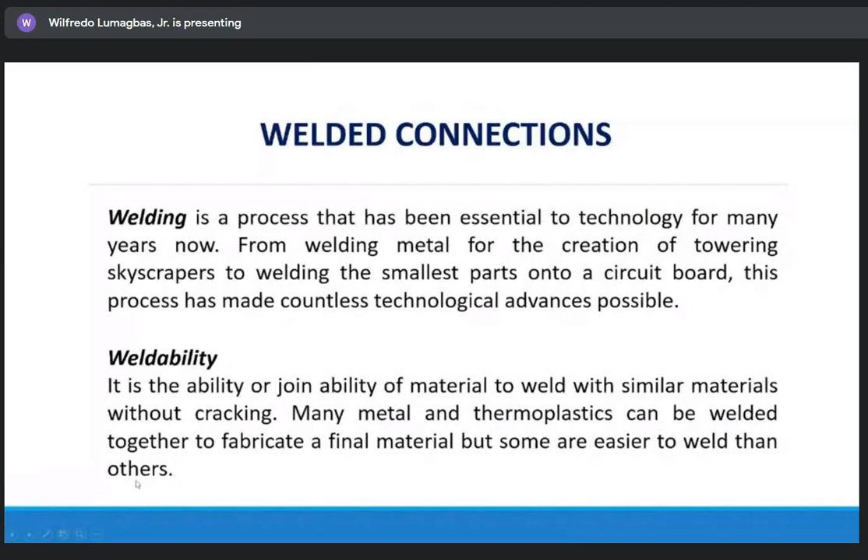To weld with similar materials without cracking. Many metals and thermoplastics can be welded together into a final material, but some are easier to weld than others. That's weldability, and there are factors affecting weldability.

First, thermal conductivity. Second, melting point. Next, thermal expansion, surface condition, and change in microstructure.

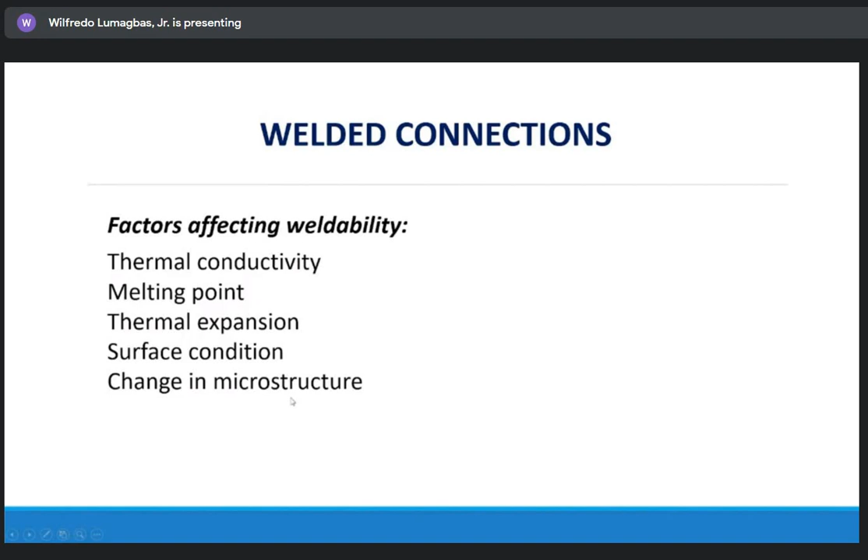Types of welding: Arc welding. Arc welding is the oldest of these three welding processes. In addition, it can also be one of the most cost-efficient methods. In this process, minimal materials and energy are used to complete the job, which makes it easier and faster to perform. However, it takes a lot of practice to create sturdy and consistent welds.

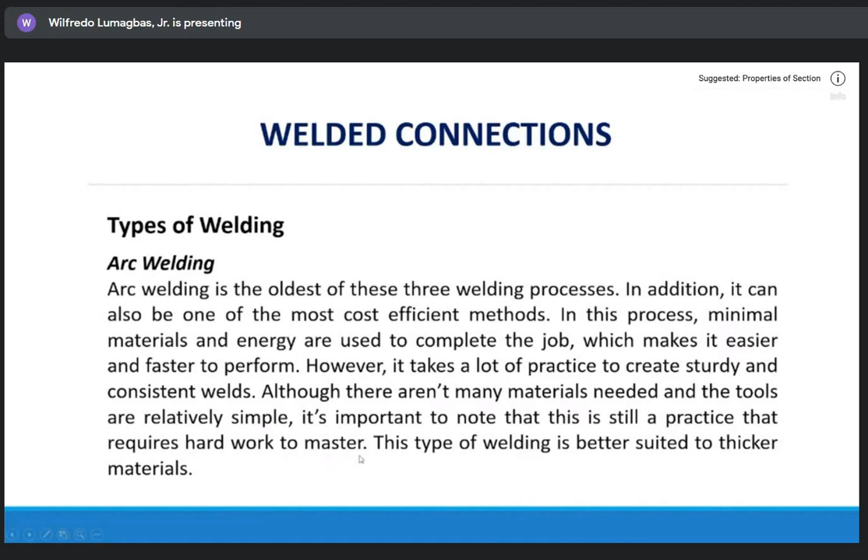Although there aren't many materials needed and the tools are relatively simple, it's important to note that this is still a practice that requires hard work to master. This type of welding is better suited to thicker materials.

MIG welding, also known as GMAW welding, uses a thin wire as an electrode. That thin wire then gets fed through the welding instrument, being heated as it travels towards the welding site. There are two main processes to accomplish this type of welding: gas or MIG, and gasless or flux core.

Gasless MIG saves money in terms of equipment, but also raises costs in terms of supplies. The wire needed for this type of welding is more expensive. Gas MIG, on the other hand, is more complex, yet the wire costs less and it produces cleaner lines.

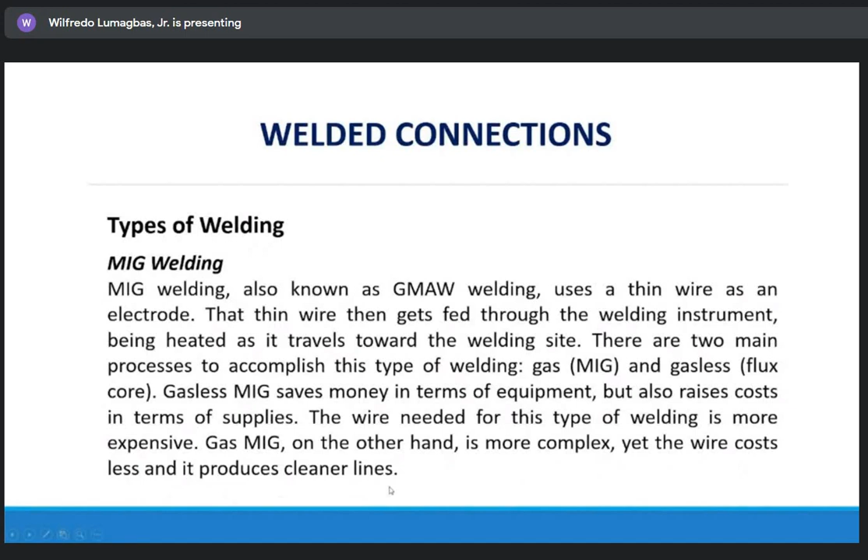TIG welding is undoubtedly the most versatile of all these welding processes. However, it is also the one that takes the most time to master, and it is the least productive of all three. That being said, it also produces the highest quality welds. TIG welding is recommended for larger projects or those in which you need more control over the welding.

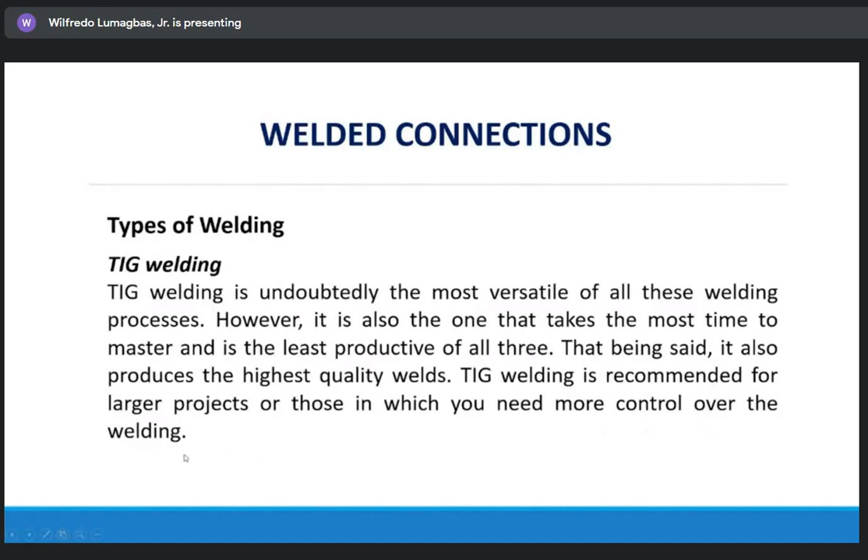Types of welds: Fillet welds. A fillet weld joins two surfaces at an approximate right angle to each other. There are several types of fillet weld. Full fillet weld is a weld where the size of the weld is the same as the thickness of the thinner object joined together.

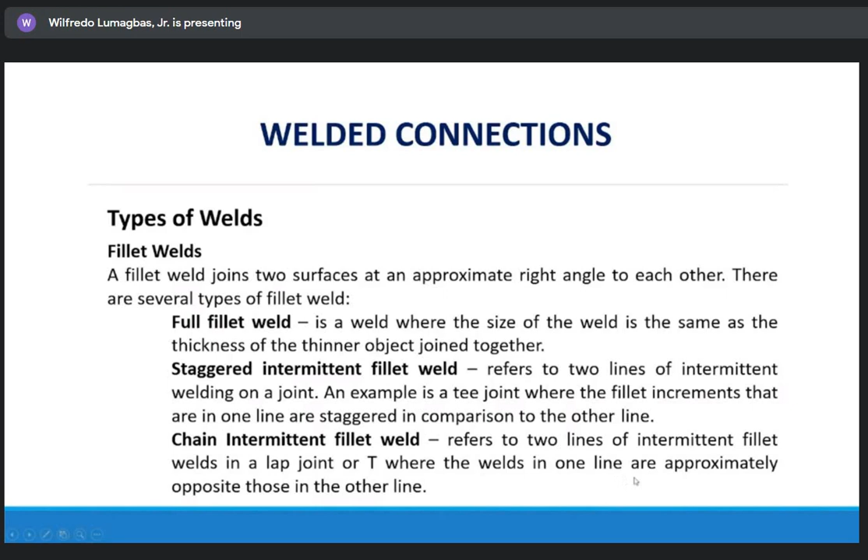Staggered intermittent fillet weld refers to two lines of intermittent welding on a joint. An example is a T-joint, where the fillet increments in one line are staggered in comparison to the other line. Chain intermittent fillet weld refers to two lines of intermittent fillet welds in a lap joint or T-joint, where the welds in one line are approximately opposite those in the other line.

This is a T-joint, this is a lap joint or overlapping, and this is the corner joint. So these are the applications of fillet welds in single or in double form — this is based on single and this is on double.

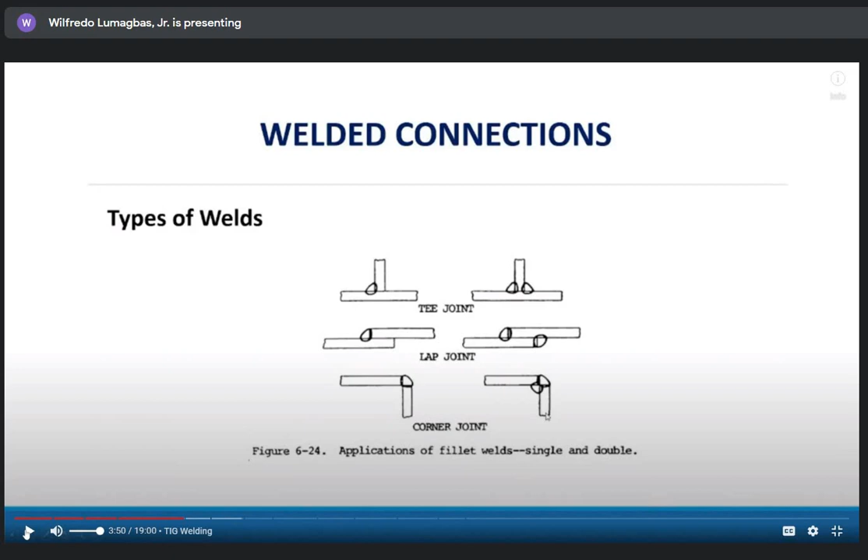Groove welds: the second most popular type of weld is the groove weld. There are 7 basic types of groove welds. The groove weld refers to beads that are deposited in a groove between two members to be joined.

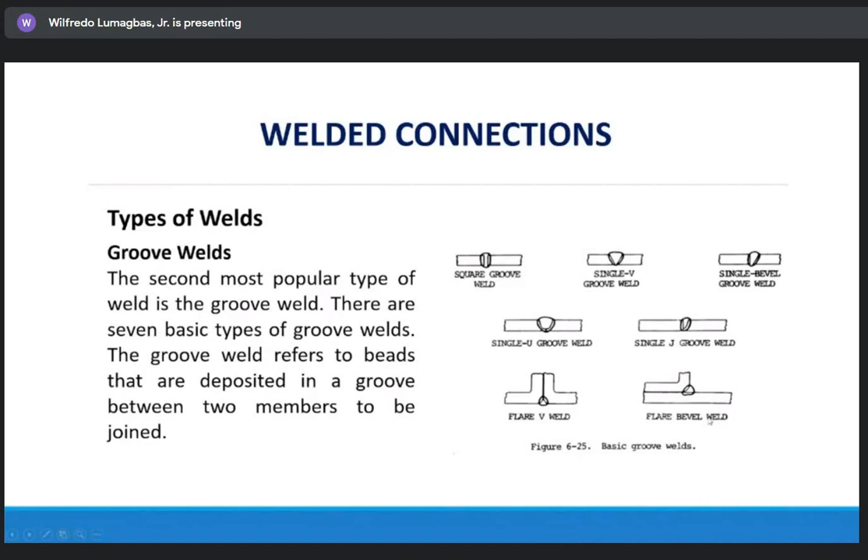For surfacing weld, these are welds composed of one or more strings or weave beads deposited on an unbroken surface to obtain desired properties or dimensions. This type of weld is used to build up surfaces or replace metal on worn surfaces. It is also used with square butt joints.

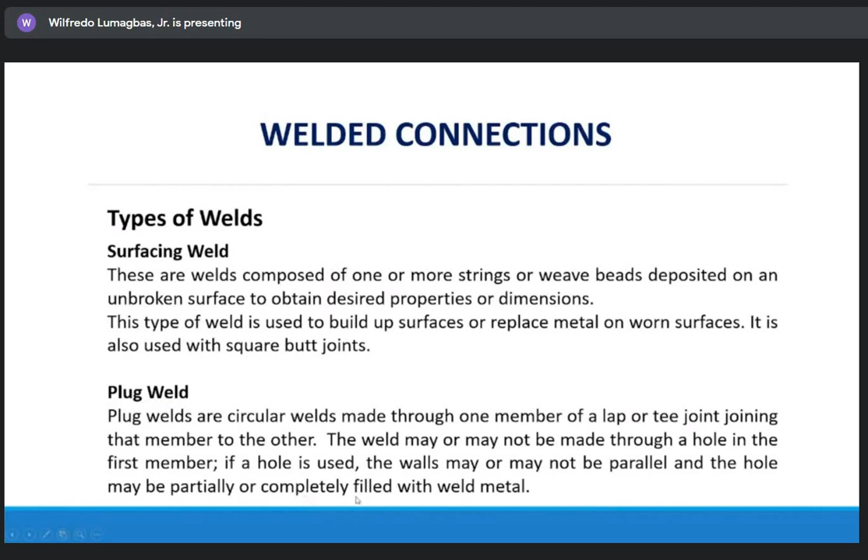Plug weld: plug welds are circular welds made through one member of a lap or T-joint, joining that member to the other. The weld may or may not be made through a hole in the first member. If a hole is used, the walls may or may not be parallel, and the hole may be partially or completely filled with weld metal.

For the slot weld, this is a weld made in an elongated hole in one member of a lap or T-joint, joining that member to the surface of the other member that is exposed through the hole. This hole may be open at one end and may be partially or completely filled with weld metal.

So these are the surfacing, plug, and slot welds. Surfacing welds, and this is the plug weld made through a member without holes. And this is the slot weld, and the plug weld made through holes.

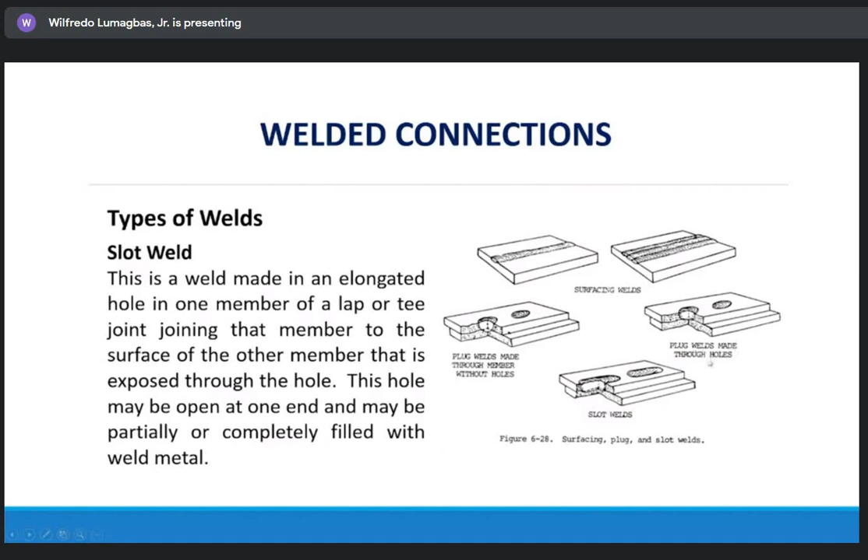Flash weld: flash welding is referred to as a resistance welding process where fusion is produced over the entire abutting surface. Seam weld: a weld made by arc seam or resistance seam welding where the welding process is not specified. This term infers resistance seam welding.

Spot weld: a spot weld is a weld made by arc spot or resistance spot welding where the welding process is not specified. This term infers a resistance spot weld.

Upset weld: an upset weld is a resistance welding process where fusion occurs progressively along a joint over the entire abutting surface.

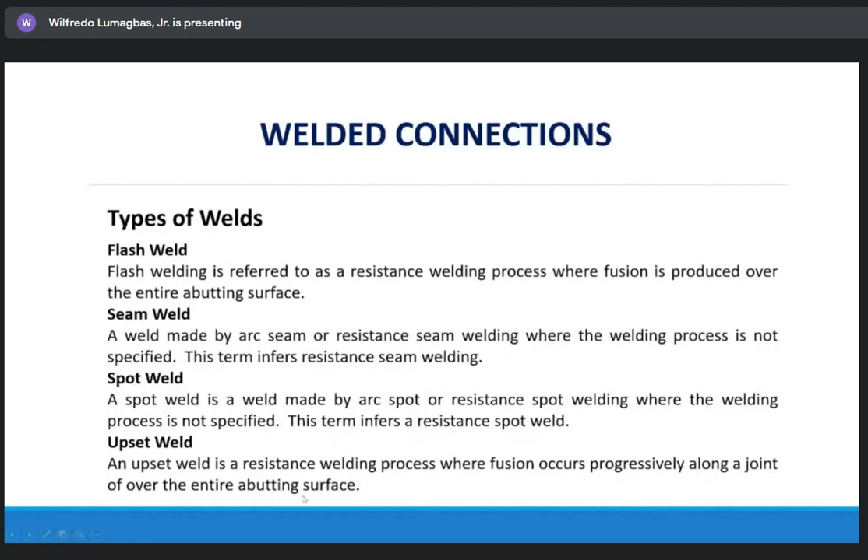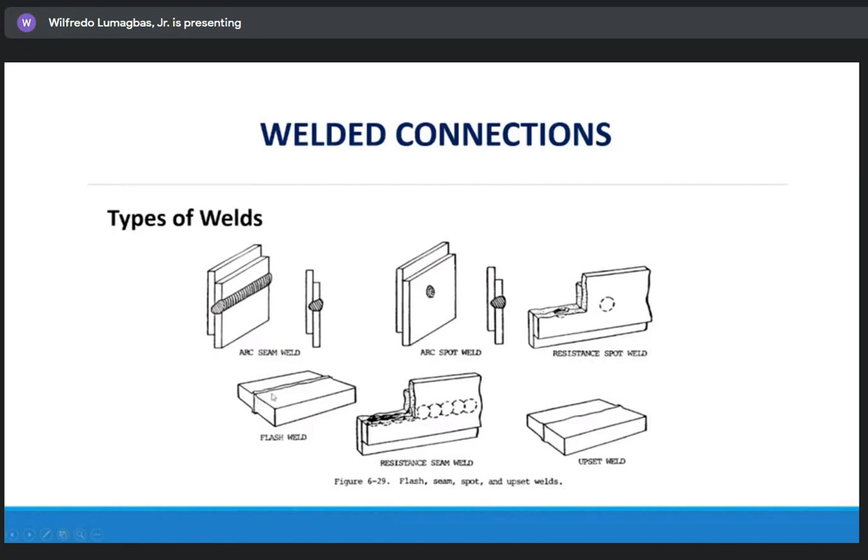So this is a seam weld, this is the spot weld, this is the resistance spot weld, the flash weld, this is the resistance seam weld, and this is the upset weld.

Different types of welding joints. First, the T-joint: a T-joint is formed when two parts are intersected at a 90-degree angle, with one edge lying at the center of the other. They are placed in the form of the letter T. This type of weld joint requires the use of a fillet weld applied on both sides of the metal.

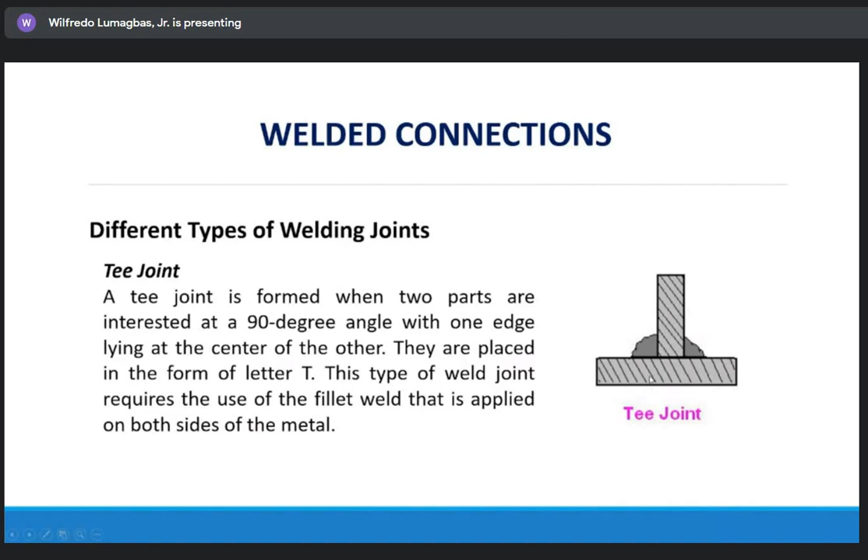Butt weld: butt welds are created when two pieces of metal are joined side by side in the same plane. It's often used for welding pipes, valves, fittings, and others. This type of joint is usually used for materials up to 3/16 inch thick. It's also not advisable to use on metals that will be subject to high impact loads in the future. So this is an example of a butt joint.

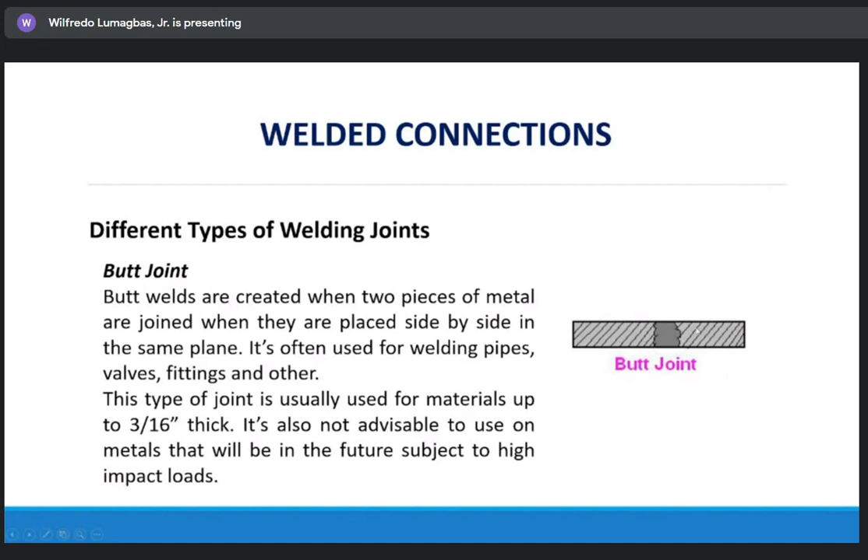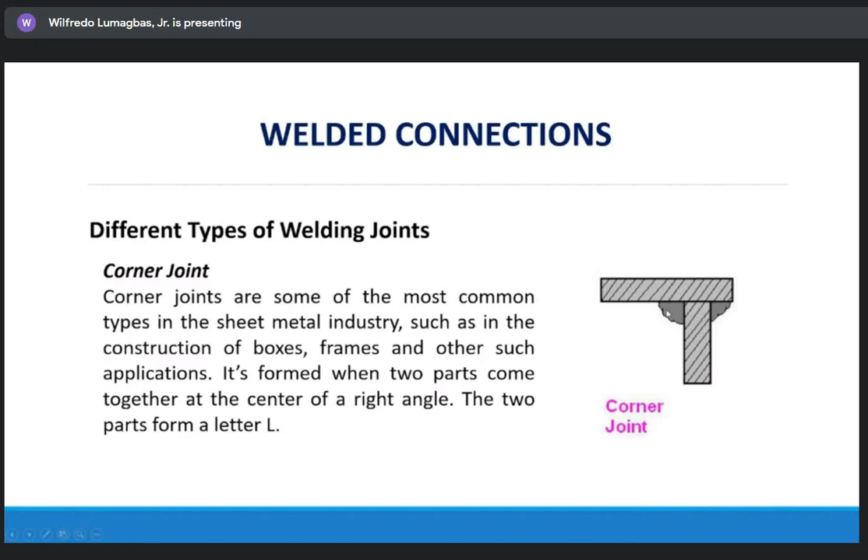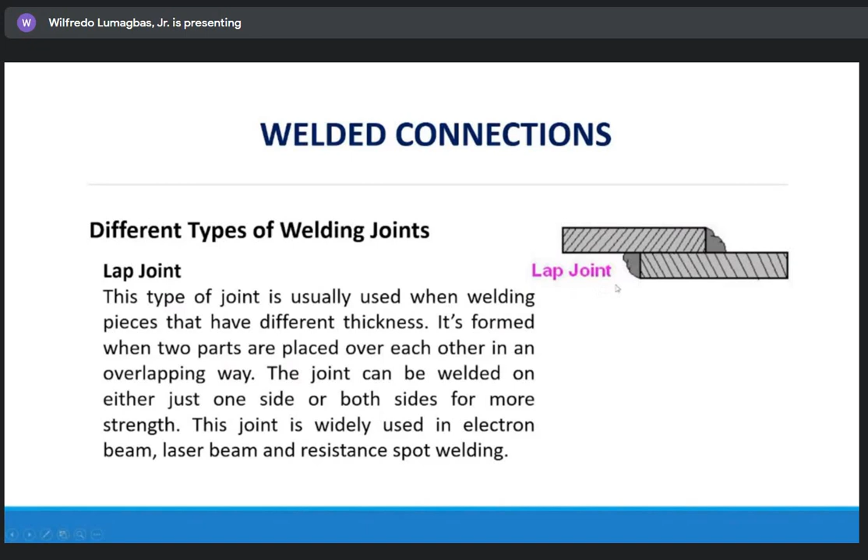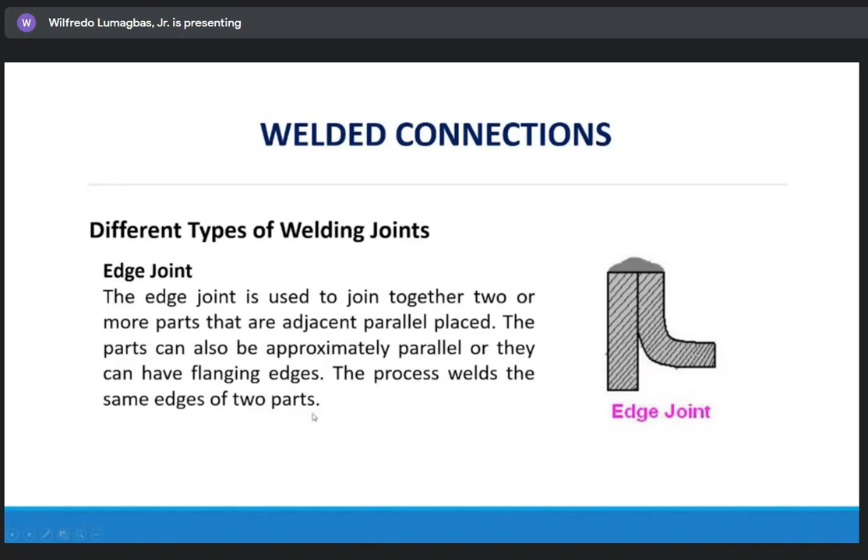Edge joint: the edge joint is used to join together two or more parts that are adjacent parallel placed. The parts can also be approximately parallel, or they can have flanging edges. The process welds the same edges of two parts. So this is the edge joint.

So for example, a 50 mm diameter solid shaft is welded to a...

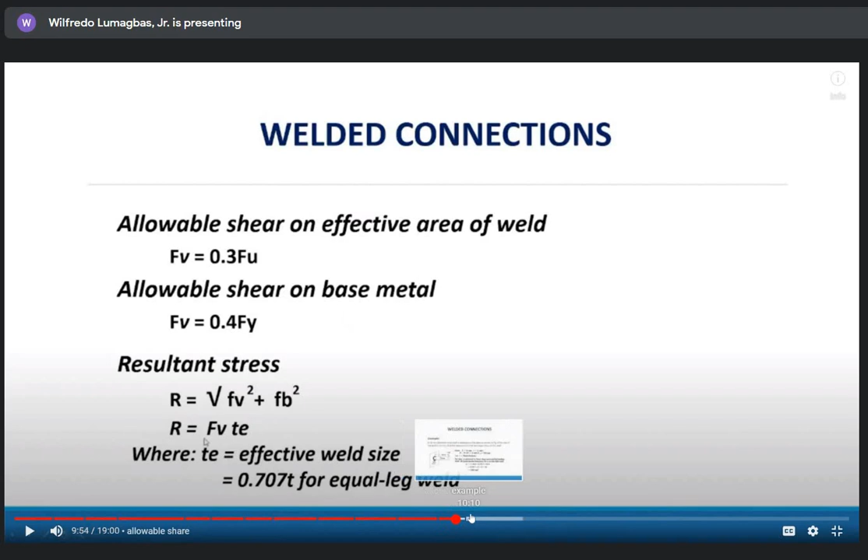So let's move on to example number 1.

A 50 mm diameter solid shaft is welded to a plate as shown in figure. If the size of the weld is 15 mm, find the maximum normal and shear stress in the weld.

This is a 10 kilonewton load, and the distance from the load to the intersection is 200 mm, and the diameter of the solid shaft is 50 mm, and the thickness or size of the weld is 15 mm. So D is equal to 50 mm, the diameter of the solid shaft. S is equal to 15 mm, the size of the weld. P is equal to 10 kilonewton, or in terms of newton, 10,000 newton. And E is equal to 200 millimeter.

Let T be equal to throat thickness. The joint is subjected to direct shear stress and bending stress. We know that the throat area for a circular fillet weld is equal to T times pi D, where pi D is the circumference of the circle, multiplied by the throat thickness.

It is 0.707 S times pi D. The size of the weld is 15, so 0.707 times 15 times pi, multiplied by D, the diameter of the solid shaft, which is 50 mm. The value is, area equals 1,666 millimeter square.

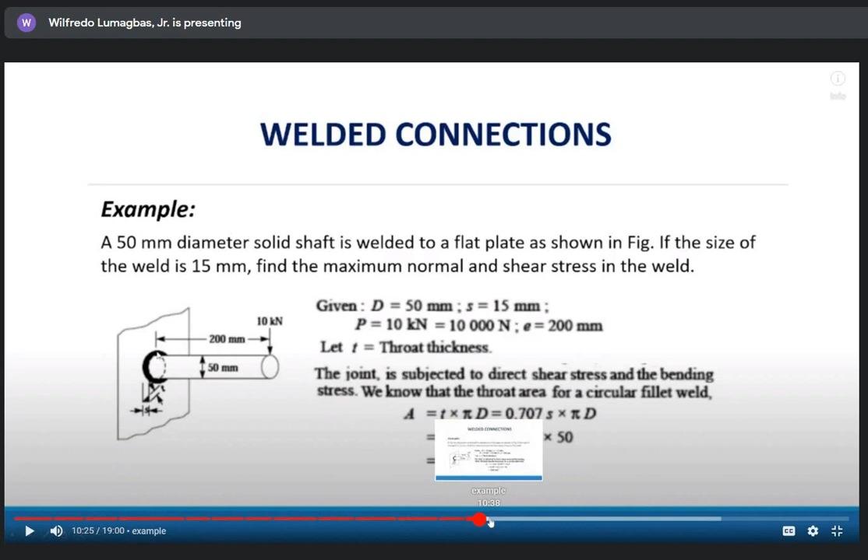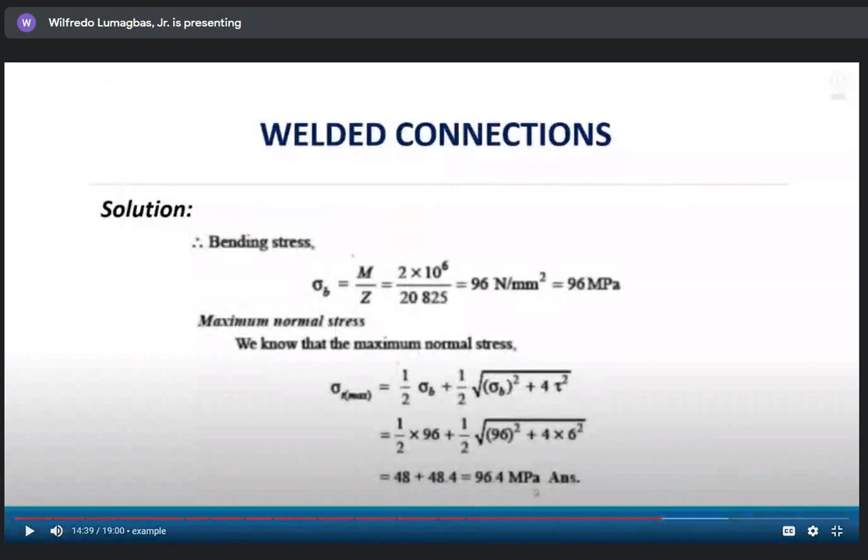Any question? So far none. What about the unit conversion from Newton per millimeter squared to megapascal? Understood? Okay, no one answered, so I guess you understand.

Alright, let's continue with problem number 2. Megapascal - so this is the maximum normal stress.